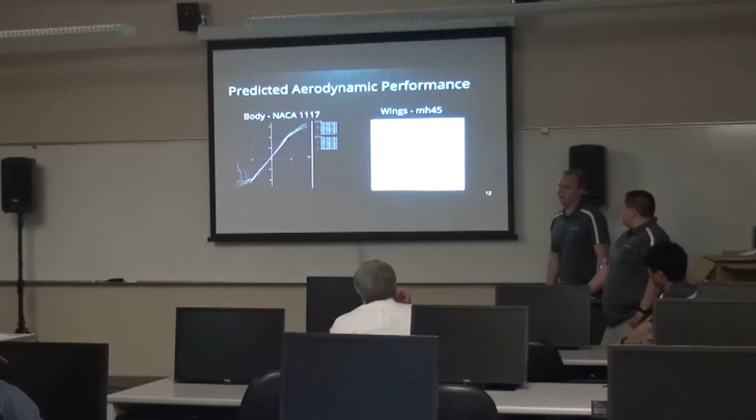Going into our predicted aerodynamics, we iterated through several different types of airfoils for both the body and the wings. For the body, we finally chose a NACA 1117, mainly because it had adequate thickness to house the payload and all the internal structures and sensors. It also had a fairly aggressive stall regime at a pretty high angle of attack.

For the wings, we chose an MH45, mainly because it had a significant amount of reflex at the trailing edge of the wings, which gave us better pitch stability. And it also has an aggressive angle of attack for the Reynolds numbers that we'd be flying at. We'd be flying at fairly high Reynolds numbers for this class.

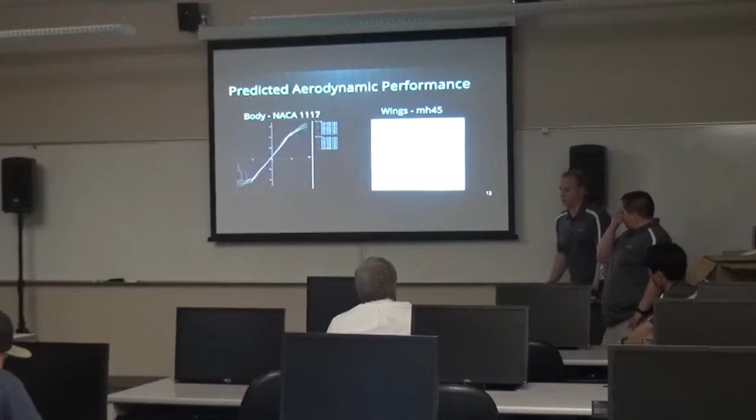Continuing on with aerodynamics, on the left we have a CL versus CD plot. One thing of note is our cruise condition, denoted by the blue dot here. Our L over D max was not at our cruise condition, which brought down the efficiency compared to what you would see in a traditional aircraft. However, we do have one of the lowest drags at our cruise condition, so that really allowed us to increase our top speed as much as possible.

And then over here on the right, we have a CM versus alpha plot. As a very high speed aircraft, we want to make sure that we can land at reasonable speeds. So after iterating a few times, we came up with a velocity of 37 miles per hour. At this condition, we would need a CL to trim of 0.76. We also wanted to keep our angle of attack less than 10 degrees to avoid stalling the aircraft with control surfaces. So after doing an analysis using AVL, we found an actual CL at this condition of 0.55. To trim, we would need an elevon deflection upward, or negative 6.23 degrees.

And this would give us a vertical descent velocity, or impact velocity. We would hit the ground at around 2 miles per hour, which is much less than what we actually designed the structure and the payload to impact. So it was about 10 times less than what we were allowed. The landing results basically show that landing is possible, but we're going to be landing pretty fast.

For the propulsion system, we wanted to design a very high-powered propulsion system to get that thrust-to-weight ratio up as high as we could. We chose a Turnigy HeliDrive competition series. It was an 800 kV motor, and the max power was 3,700 watts, which is very, very high for this class of aircraft.

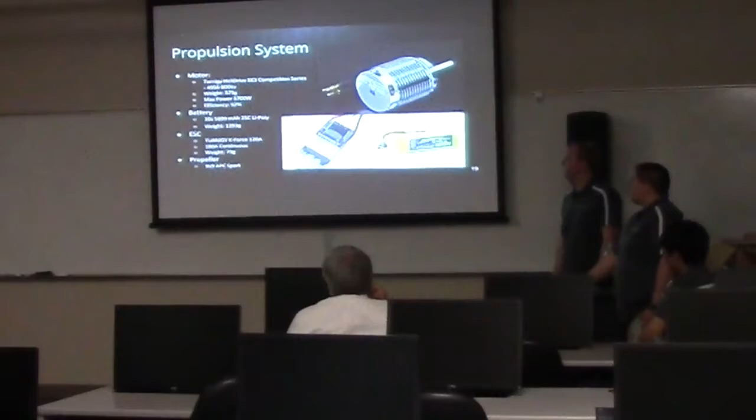And the efficiency at cruise was 92% of this motor. The battery was a 10-cell battery. It delivered the maximum wattage that the motor could take, the maximum voltage that the motor could take. And then we got an ESC that was rated for 120 amps, even though the motor could only get a continuous 100 amps. We wanted to avoid any overheating of the propulsion system, so that's why we kind of emphasized that. And the propeller was a 9x9 APC Sport.

We wanted a very aggressive propeller so that we could have the widest range before we hit that windmill effect of the propeller. Basically, the windmill effect is when your prop is basically a windmill because you're not producing enough thrust. So we used JavaProp to predict the performance of our propeller.

And over here on the right are graphs of the efficiency and the thrust of our system, and the black circles are the cruise condition. So you can see from the efficiency plot that the circle is at the highest efficiency possible for the propeller. That allowed us to really maximize our efficiency at cruise. And then we also had more than enough thrust at all of our flight regimes to achieve the mission. With this data, our total efficiency of the entire propulsion system, the propeller and the motor, came out to be 53.1%, which is a very good power conversion for this class of system.

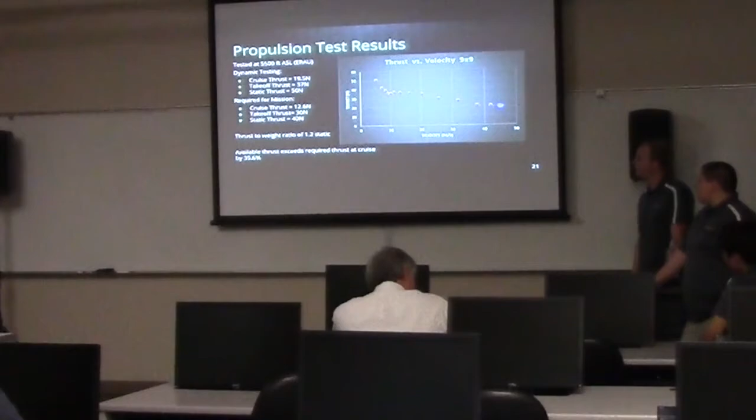We also did some wind tunnel dynamic testing of the propeller inside the wind tunnel here at Embry-Riddle at 5,500 feet above sea level. The results of that were very, very promising. We had better results than what JavaProp predicted, giving us more power than what we actually thought we were going to have. And we had much more power than what we needed for our mission requirement.

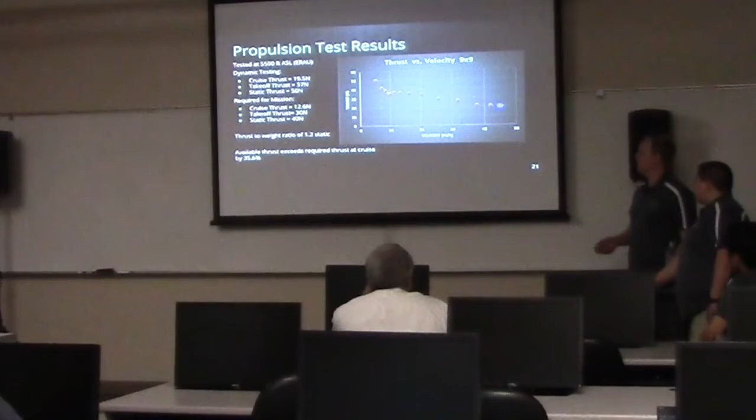We had a thrust to weight ratio of 1.2 at our static thrust condition, and we had available thrust of 35.6% more than what we needed at our cruise, allowing us to accelerate above 100 miles per hour if we needed to. And then over here on the right is the actual data of thrust versus velocity for the 9x9 propeller, with the blue dot indicating our cruise condition. So it was about 19.5 newtons of thrust at our cruise condition, when we really only needed 12.6 newtons to overcome drag. Now I'll hand off the presentation to Michelle.

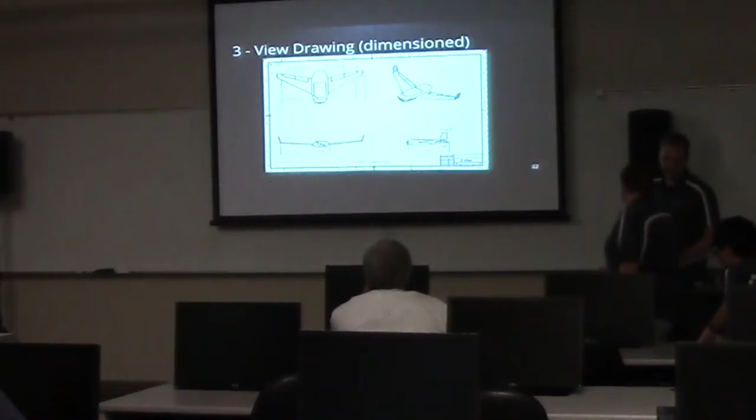I'm sorry if I sneeze. Allergy season is kind of a little rough on me this year.

So here we have the 3-view drawing. I know it's kind of hard to see. If there are any questions about extra details, at the end in the appendices we have each of the views in greater detail. One of the things I just wanted to point out here, though, is some of the major dimensions, like the size of the wingspan and the length of the total aircraft. So our wingspan is just over 50 inches. It's a little greater than 4 feet, which is not too big.

But we had a requirement that it had to be modular to carry around. So what we did is we made the wings detachable, which I'll go into further detail in a few slides. And so the length of the total aircraft is just over 24 inches, so a little more than 2 feet. This is a fairly small aircraft. We wanted to keep it as small as possible. That way the first responders could take it out into the field with them for anything, whether it's to deliver first aid supplies to anybody that's outside of range that needed it quickly, things like that.

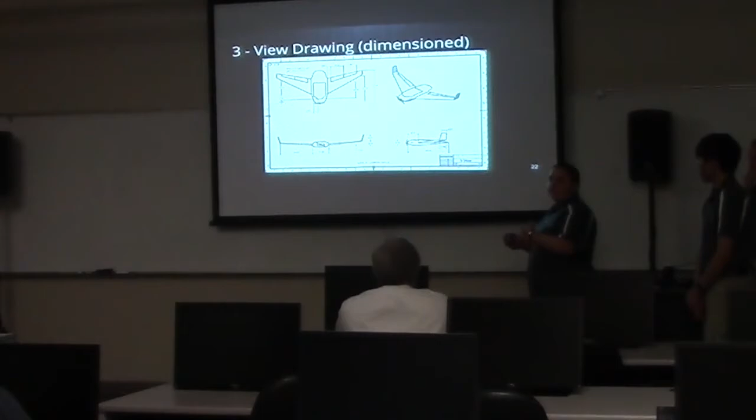And one of the things we focused on is if it doesn't need to be modular, if it's being sent from like a home base, it can just be kept put together as one whole aircraft and just sent out when it needs to be. It's faster that way, so for like the AED, if they needed to send it out from somewhere, especially out in rural areas, it's just ready to go in no time.

So for our preliminary structural design, we decided to use carbon fiber ribs for the body itself. One of the main reasons we went with carbon fiber is their strength to weight ratio. Our system, especially with our propulsion system, is very heavy, and we have to carry up to a 2.5-pound payload. So we wanted to make sure everywhere else that we cut as much weight as possible.

After all, this thing had to be hand launchable, and that was one of the hardest constraints that we had to make. So with the carbon fiber ribs, we cut that weight down as much as possible, and it was also easy to manufacture. Like Cameron will explain later on, ERAU has a shop where it was easy. We could just submit the CAD files, and it was fairly cheap to get them.

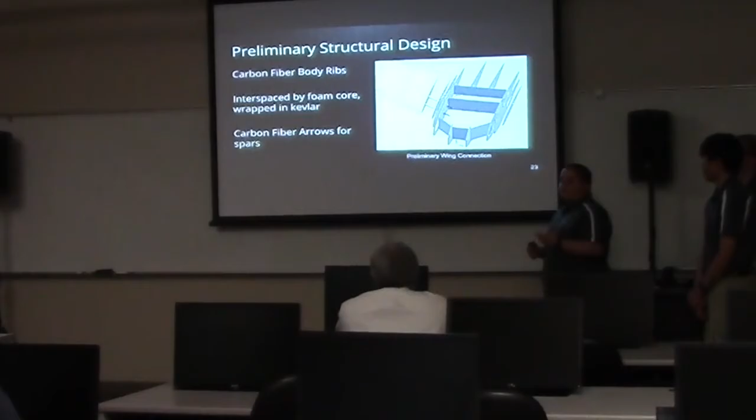So this is just a little bit more detail of how our wing connection works. The rib right here is actually the outside of the body. What happens is the spars stick out of the wings, and the spars themselves go into the body through these ribs and connect inside of the payload compartment. And we decided to do that for 2 reasons. One, it goes through all 3 of the ribs as well as the compartment. It gives it a lot of rigidity for the wings.

And we know that landing at such high speeds, if we land slightly off, hitting the wings and things like that, we need these things to be strong. So we decided to do that, and then the second reason is because this payload compartment right here also has to be held into the body.

So we thought, okay, if the first responders are in a hurry, they need to put this together real fast. And if it's not already together, 4 screws puts the entire thing together, wings, compartment, and everything. So we kind of combined them to work out as far as time and for the strength of the overall wing connection of the aircraft.

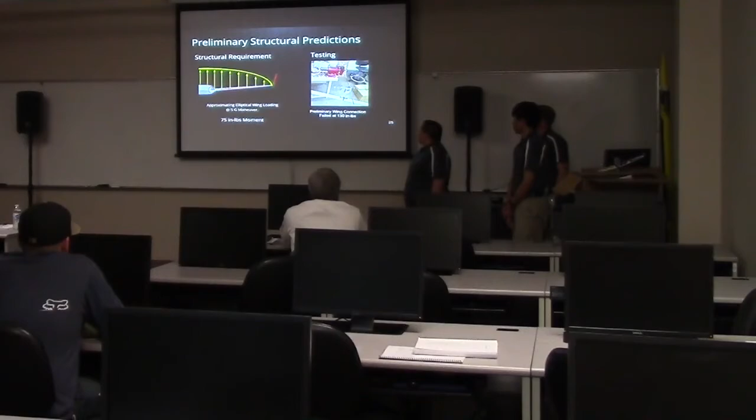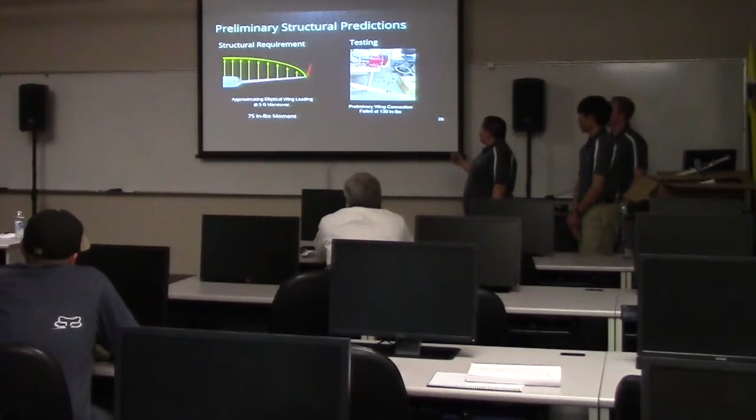So here's where we did some testing on the carbon fiber arrows. From calculations, we knew that our wings had to withstand an approximate 75 inch-pound moment. So what we did is we put the arrow in the device up here, as you can see, and then we weighted it down here. What ended up happening was we were fairly surprised. We had never had an experience with this kind of thing.

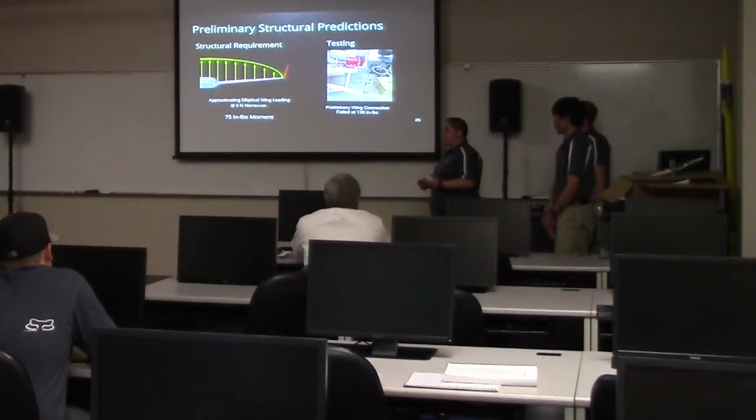We were expecting a Dragon Plate that comes with all these specs and things like that. We had no experience with the whole archery equipment. So when we put it in, we were pleasantly surprised that it did not fail until a moment of about 130 inch-pounds. So it gave us the confidence that we needed that this would stand up to the load that it would see during flight, and especially during landing.

We also did an FEA analysis. We just wanted to see how the distribution was on the wings. And we used the 75 inch-pounds like I mentioned before with that spar connection. And the result of this, we wanted to see kind of what our factor of safety was, how close we were, and things like that. So it gave us a factor of safety of 2.5, which is more than enough to send us forward with this design. We were fully confident that this would work.

So what ended up happening is we cut that payload compartment right behind, so the battery is now separate from the payload, and it actually ended up working out for us in the fact that we realized upon some of our first test flights that our CG was not quite in the right place. So that allowed us to move our battery, which is really quite heavy because it's a 10 cell, and it gave us the ability to move our CG around as we needed.

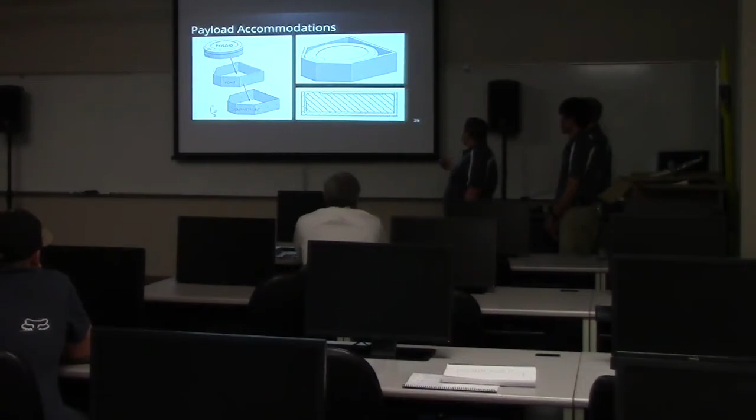And it helps cushion the payload when it's inside of the compartment to decrease that impact, that impulse on the payload itself. And here's just a section cut to show how everything fits together. And these are the holes that I mentioned before where the spar is attached into the payload compartment.

Okay, so I'll talk a little bit about our subsystems. We use a Pixhawk autopilot, and the main reason was it was fairly cheap, and we had a guy up at BYU who's had quite a bit of experience. We haven't really used autopilot systems as much, so whatever he was comfortable with, we were comfortable with, and that's why we went with it.

We also have a first-person view camera. We decided, if we're flying a 5-mile mission, and for some reason our autopilot isn't working, that pilot needs to be able to see what the heck is going on, and they need to be able to see where they're going. And then we also use a telemetry system. There's not much to really say about that one.

So now I'm going to hand it over to Cameron, who's going to go into more detail of our manufacturing. So first of all, can anyone hear me in the back? All right, that's good. I'm Cameron Watanabe. I'll be finishing up with manufacturing.

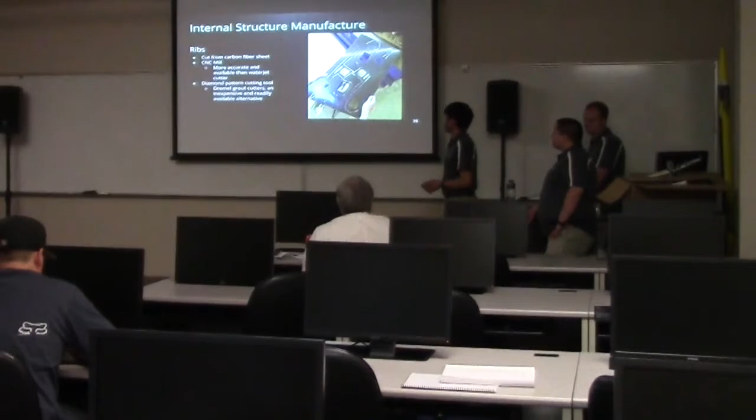Internal structure manufacture, which was done at BYU, as previously said. Basically, the ribs were cut from carbon fiber sheets created from a local vendor nearby. These were then CNC milled to give more accurate tolerances. And lastly, they were Dremel cut and gouged so these parts can be sent.

Payload compartment, this was done at Tuskegee University. What they did was they used a CNC wood mold shown on the left. They sprayed the mold and then vacuum bagged fiberglass to a finish. Lessons learned there: the arrangement of non-congruent plies, the wet layup onto the mold is very delicate because of the thickness of the fiberglass. The vacuum bag setup and care is labor intensive, just like the wings at ERAU. And lastly, orthogonal corners are susceptible to pinching and discontinuities.

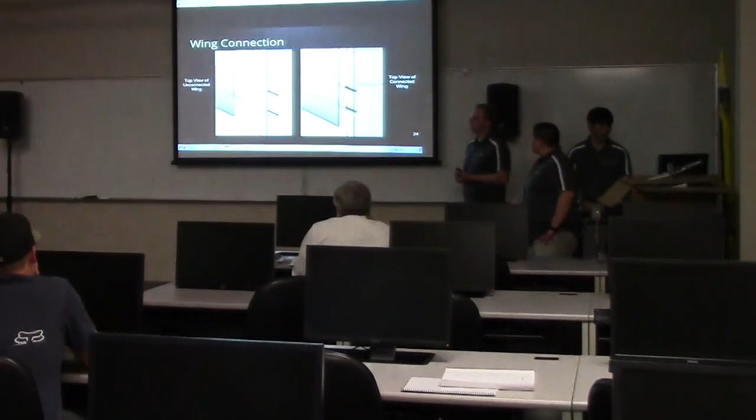So, first thing, I guess I'll talk about the propulsion system, the ESC. So you guys, I think I heard you say you undersized the ESC for the motor, correct? We oversized it, so the motor was rated for 100 amp continuous draw, like 105 amp burst for 15 seconds, which was really never going to happen. We oversized it to be able to deliver 120 amps. This way, the ESC wouldn't overheat and everything.

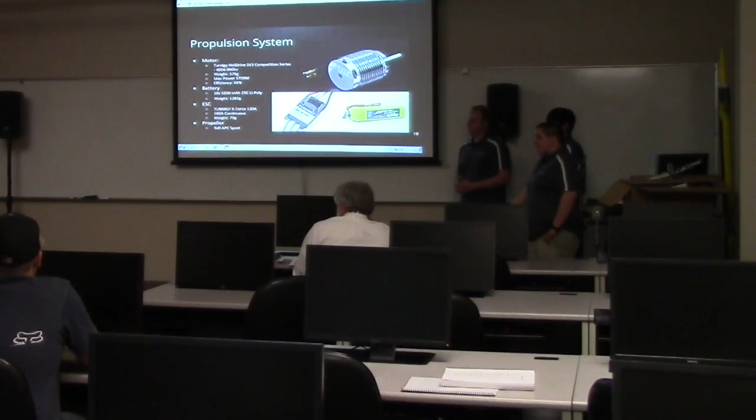Okay, yeah. Just be very careful with that because these ESCs will actually pull more amperage and can fail. And so I think it's good that you did oversize it because they end up pulling more in dynamic conditions. Yeah, we wanted to avoid the ESC blowing up because those are prone to basically overheating and blowing up when they're overstressed. And so I noticed too on your guys' electrical diagram, I think you didn't have a parallel power supply to the ESC to your flight control surface.

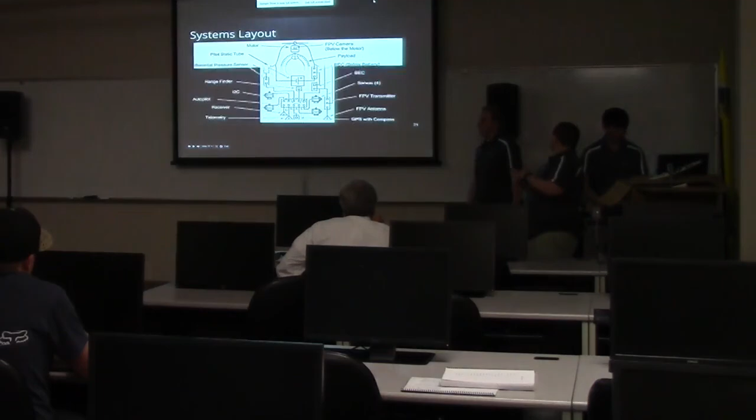Like a secondary? I'm sorry. Yeah, secondary power supply? Yeah, we weren't able to design in a secondary power supply. So if the main battery failed, then we wouldn't have control surfaces or anything like that. Right. So one thing that would be absolutely necessary if it was to be made commercially is there would definitely have to be some type of system to power those in case of a battery failure or something else. Yeah.

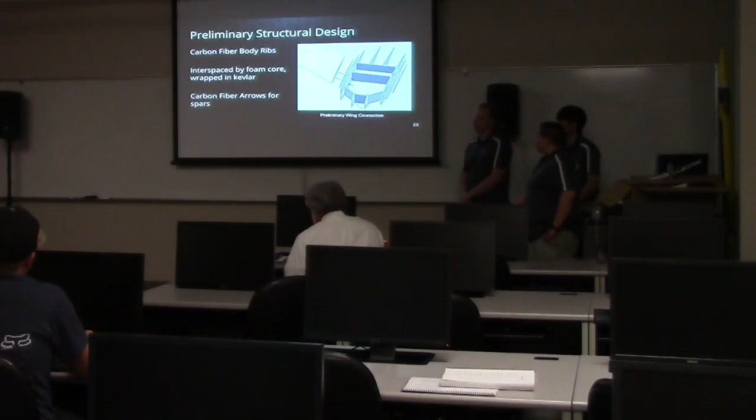And then just a couple comments on some of the structures. I think slide 23 is where I got some notes written down. I really like the idea with the wing and pulling that through multiple ribs. I thought that was a good idea. And that'll help basically distribute your moment through that connection. So that was a very good idea that you had with the multiple ribs and the fuselage. And then with the changes that you guys made with adding in those 3D printed parts at the wing, I felt that was a pretty good job there.

I was curious, do you know how much of a weight impact that had? Whereas those ribs were probably pretty light compared to the 3D printed material. So in the rapid prototype printers, they actually used the low density plastic. It was a little heavier than the 3 ribs that it replaced, but not significant enough to really matter. Another thing is it decreased the complexity of manufacturing and putting together, and, I don't know, you saw those nosedive crashes at 40 miles an hour.

Instead of spending 5 hours or an entire day to fix those, we cut it down to 1 hour; we could just slap in some more main connections, and everything goes. So the modularity that it provided was almost worth it. It's a very good trade-off to the design. To know exactly where it would fail was really helpful. So even if our wings fell off, the wings weren't breaking.

The wing tips, like he had mentioned, they would break, but they were pretty improvised, because we messed around with the size of those a lot. So with that, the wing connection and the motor mount could break, and it was really easy to just put a new system in place. And actually, overall, after all the design changes we made to the structure of the aircraft, it ended up about half a pound lighter than the original. Yeah, we took out a lot of carbon fiber and stuff like that.